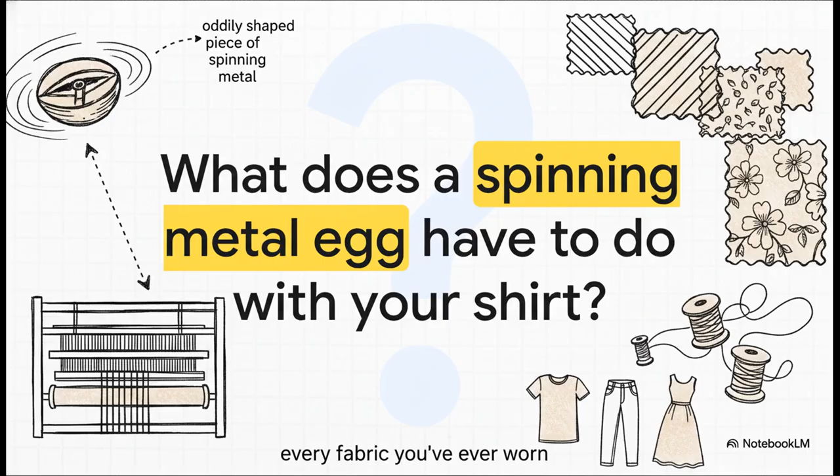Okay, so before we get to that mechanical egg, we've got to cover the most fundamental, the most basic action in all of weaving. It's a process, and it's called shedding. To get this, I want you to picture hundreds of threads all stretched out, top to bottom. Those are called the warp threads. Now, shedding is just the act of lifting some of those warp threads up while leaving the others down. This creates a little triangular tunnel, an opening, and that is called the shed.

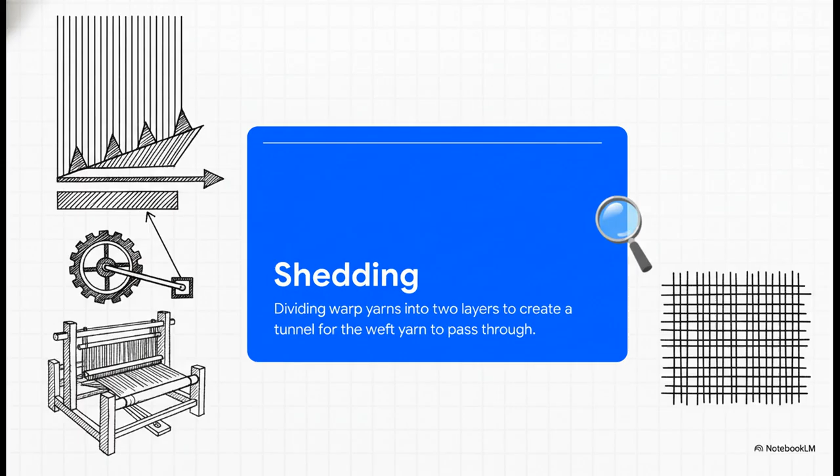It's inside that little tunnel that a second thread, the weft, gets shot through from one side to the other. Lift, pass through, lower. That's it. That one simple action is the basis of all weaving. Now, you might think, okay, opening a gap, that's easy. But the exact size and shape and timing of that opening, what engineers call the shed geometry, is absolutely critical.

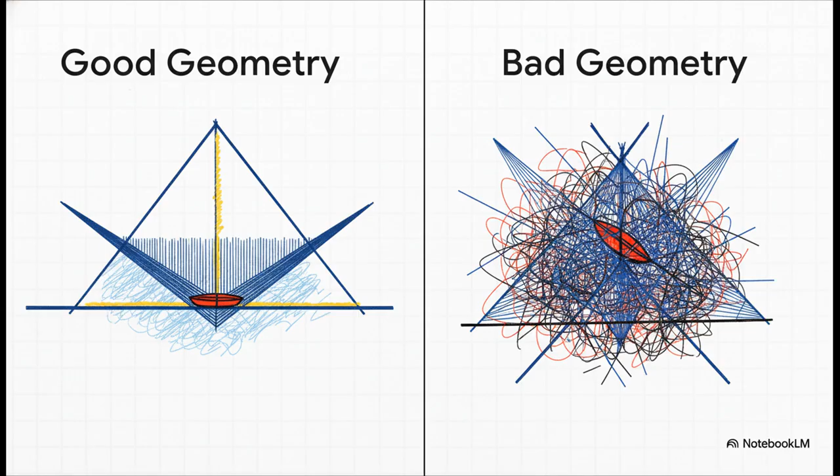You see, when it's done right, you get way less friction, fewer threads snapping, and the whole machine just runs better. But if you get it wrong, you just get a tangled mess, broken threads, and really bad fabric. So what is it that controls this all-important opening and closing? What does it with perfect precision, maybe thousands of times a minute? Well, this brings us to the real hero of our story.

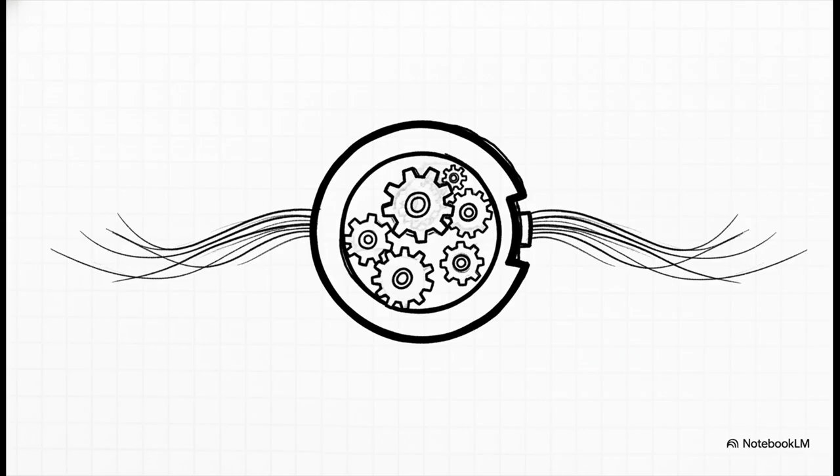It's called a shedding cam, and the best way to think about it is like a mechanical brain, or maybe even a piece of physical computer code. It's this beautiful, simple device that takes simple spinning motion and turns it into a perfectly timed up and down movement. It literally choreographs the entire dance of the threads. And there it is. That's our spinning metal egg. It really doesn't look like much, does it?

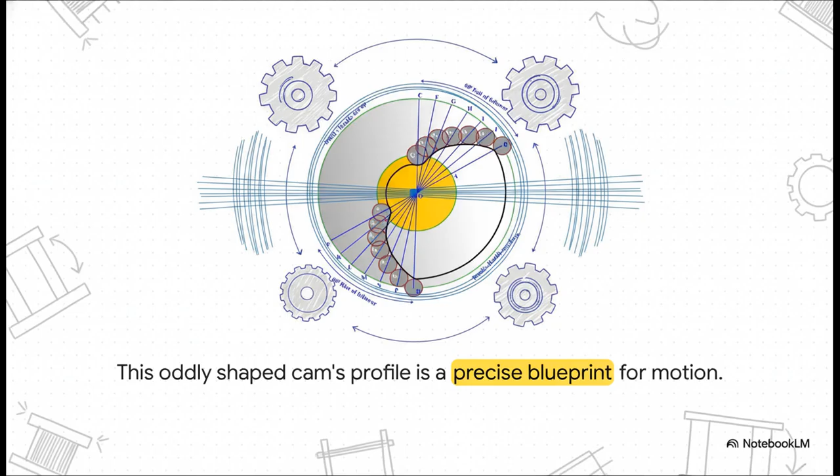But every single curve, every flat spot on its edge is a carefully calculated instruction. As this thing spins, another part, called a follower, just rides along its surface. So the shape of the cam tells that follower and all the threads connected to it exactly when to move up, when to move down, or when to just stay perfectly still.

And here's where it gets really amazing. The cam isn't a one-size-fits-all kind of part. Oh no, its exact shape is custom-made, determined by the specific pattern of the fabric you want to create. This quote really says it all. A pick, in weaving lingo, is just one pass of that side-to-side weft thread. So a really simple pattern that repeats every 2 picks, that needs one kind of cam.

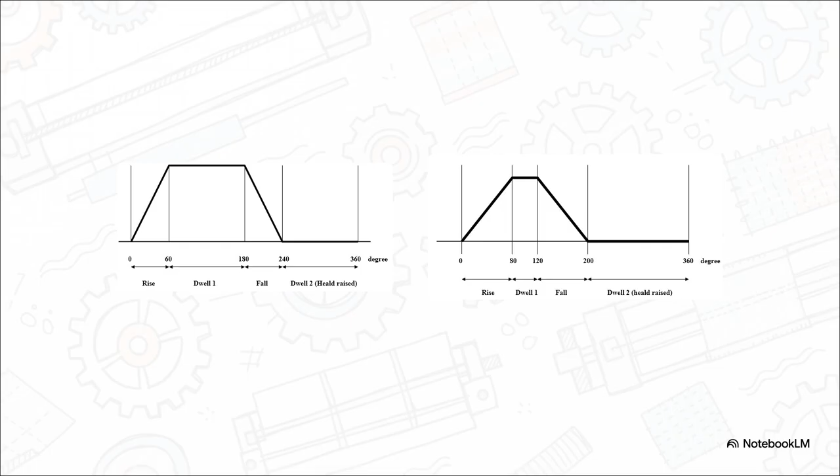It's asymmetric. The threads actually have to stay up for longer than they stay down. And this is the aha moment. This is the result. That simple symmetric motion plan we just saw, that creates the cam on the left. But that more complex asymmetric plan for the twill, that creates the totally different cam shape on the right. Those abstract instructions from a graph are physically milled into a real piece of steel.

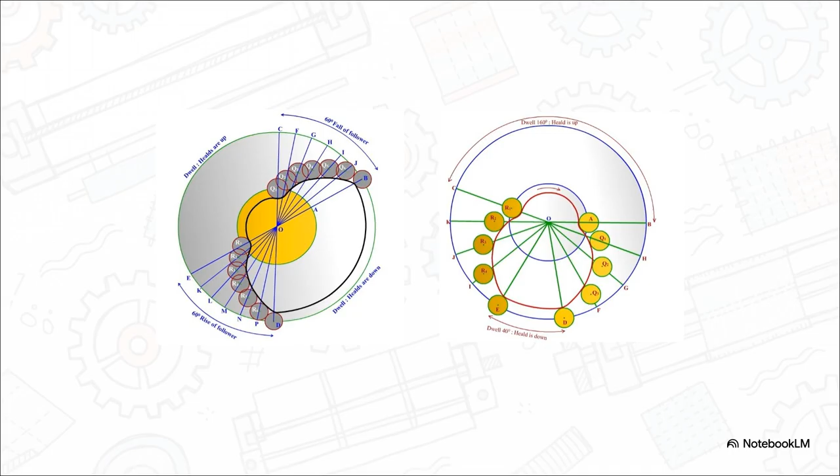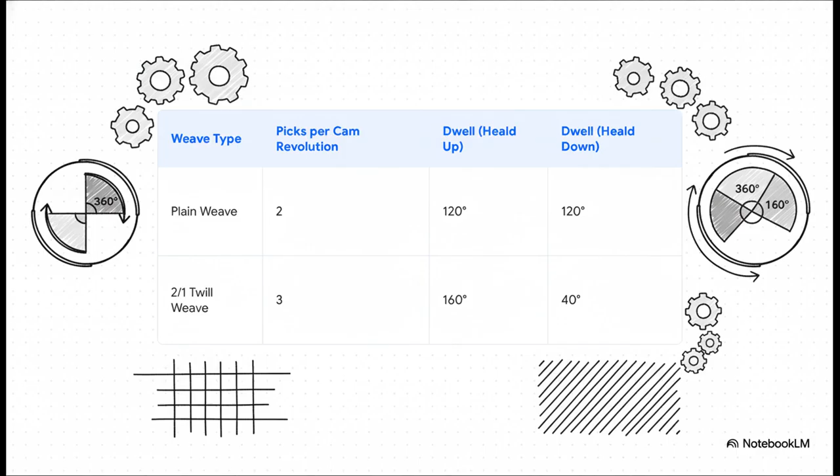Let's break it down by the numbers. For a plain weave, the cam does its thing over 2 picks. The threads spend the exact same amount of time up as they do down, 120 degrees of the cam's rotation each. But check out the twill weave. The cycle is 3 picks long, and for it to work, the threads have to stay in the up position for 160 degrees, but only 40 degrees in the down position. That very specific difference in timing is what creates that classic diagonal pattern you see in denim.

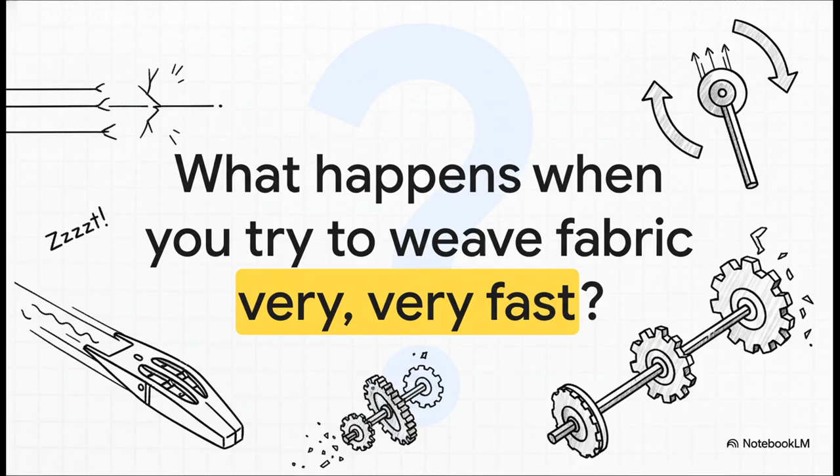But wait, there's another layer of engineering genius here. Because it's not just about when the threads move, it's about how they move. And when you're talking about industrial speeds, the quality of that movement is absolutely everything. So what happens when you try to do this really, really fast? I mean, when looms are running at incredible speeds, any kind of abrupt, jerky movement creates huge amounts of stress. It just wears parts out and breaks threads left and right. So the engineers had to figure out a way to make the whole thing smoother.

And this shows the solution perfectly. You've got two styles of motion here. One is a simple, linear motion. It starts instantly, moves at one speed, and then stops on a dime. You can almost feel the sharp corners in that motion profile. But the other one is a much more elegant solution. It's called simple harmonic motion, or SHM. Just notice how it gently speeds up to its peak and then smoothly slows back down to zero.

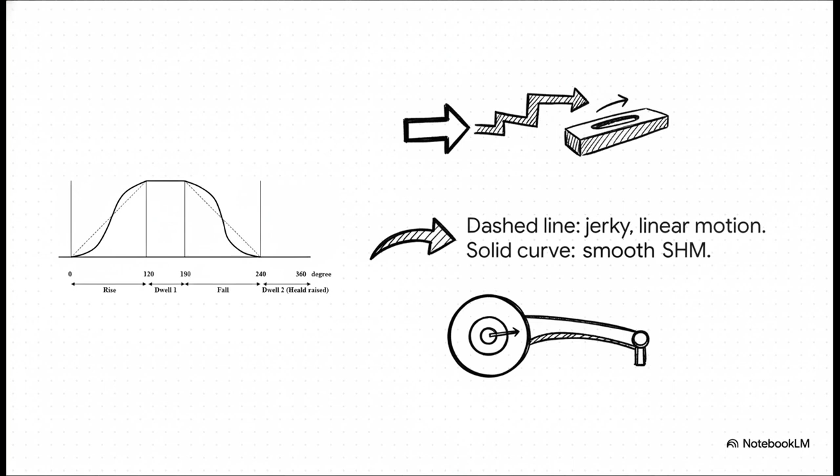The difference is pretty simple to imagine. Linear motion is like flooring the gas pedal in your car and then slamming on the brakes. It's abrupt, it's jarring. Simple harmonic motion, on the other hand, is like smoothly pressing the accelerator, getting up to speed, and then gently easing off. It's all about avoiding those sudden, stressful changes.

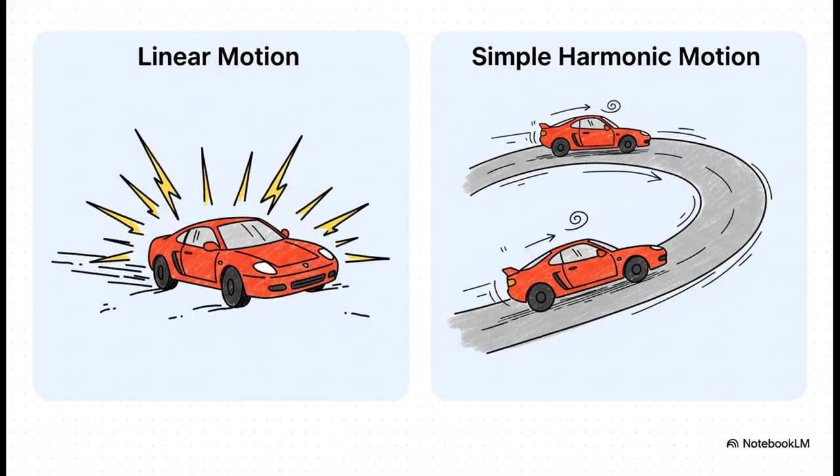And you can literally see those invisible forces here. For that jerky, linear motion, the acceleration graph shows these huge instant spikes of force. Bam! That's what causes all the stress and vibration. But for SHM, the acceleration is a smooth, gentle wave. So much less stress, so much easier on the whole machine.

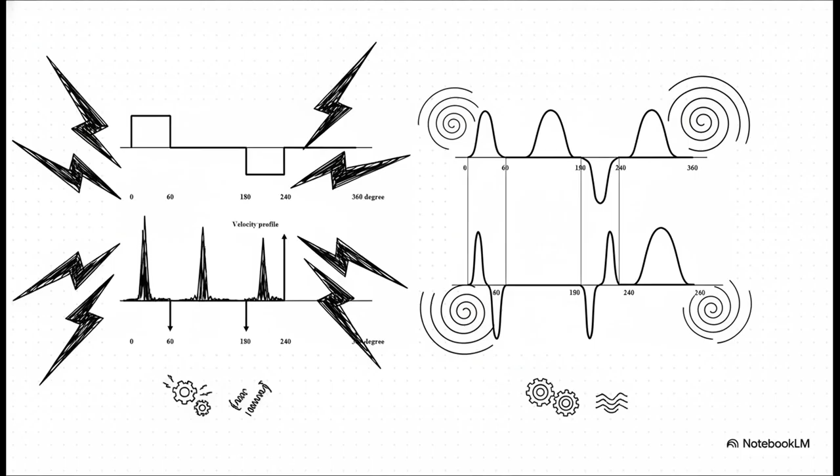So why go to all this trouble to engineer such a specific, smooth curve? What's the real-world payoff? What's the bottom line? Well, the benefits are just enormous. By using a cam profile that creates this simple harmonic motion, the entire weaving process becomes way smoother. The forces are lower, the movement is less jerky, and, this is the big one, it puts far less wear and tear on all the mechanical parts of that loom.

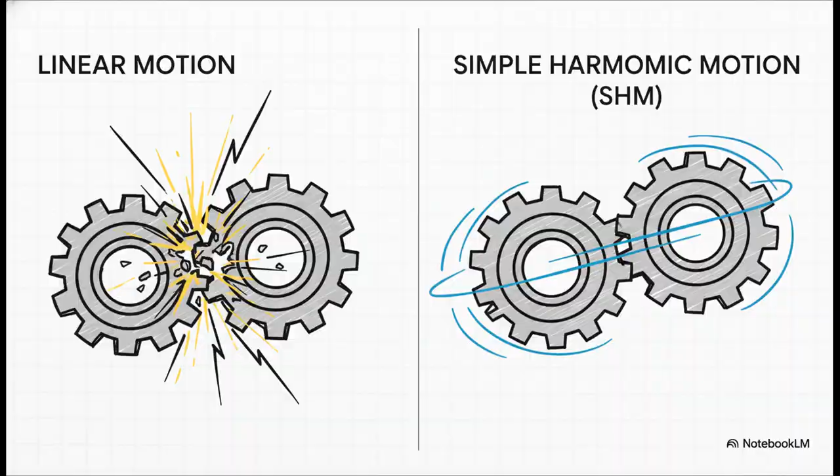And where does all that lead? To higher efficiency. It's that simple. Smoother motion means the machine can run faster, with fewer stops from broken threads or worn-out parts. So this one, seemingly tiny change in the shape of a metal cam has a massive impact on the productivity of an entire factory.

So the next time you put on a t-shirt or pull on a pair of jeans, just take a second. Remember that its very fabric was made by an intricate dance of threads, a dance choreographed by a spinning piece of metal whose shape was a perfect, physical blueprint for motion. It really makes you wonder, doesn't it? What other invisible, brilliant designs are hiding in plain sight all around us?